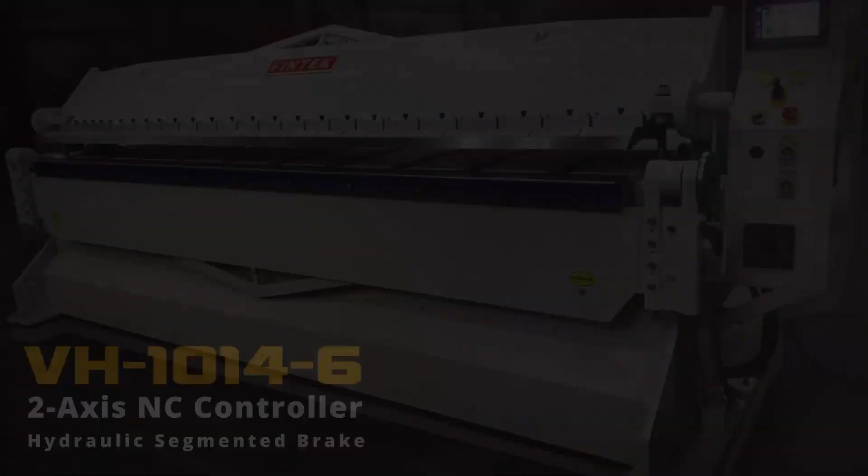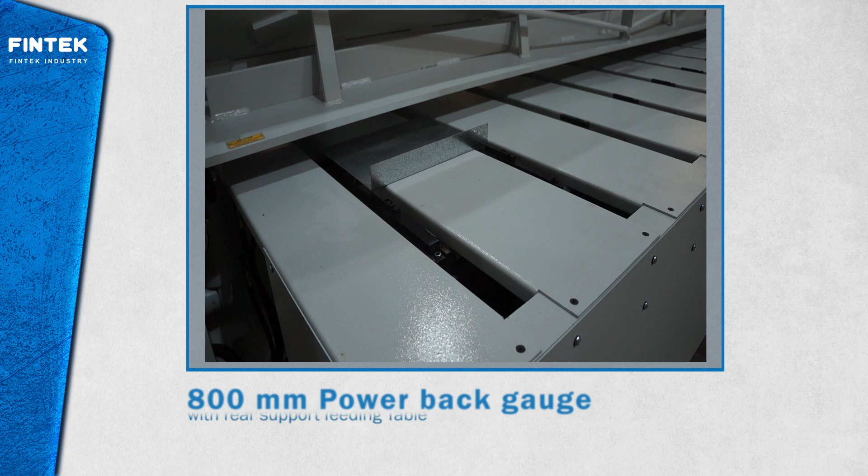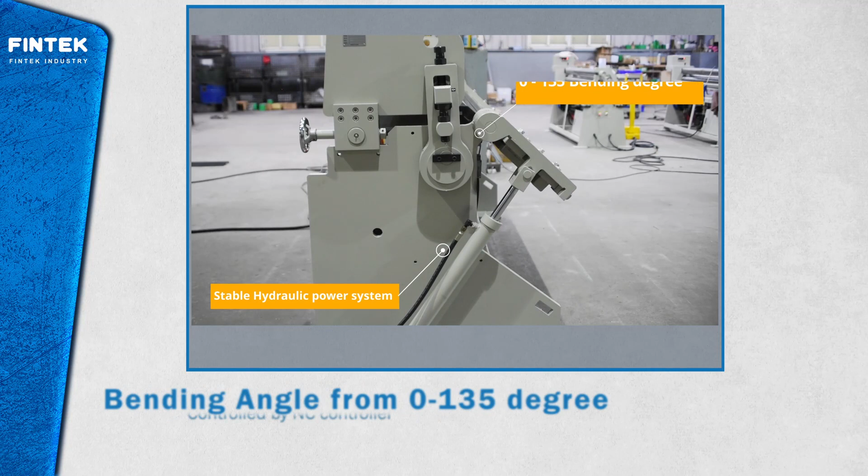The features of this model come with segmented finger blades for box bending, 800mm power back gauge, 2-axis NC controller with 7 inches touchscreen, upper beam adjustment for various thickness bending in perfect sharp angle, bending angle from 0 to 135 degree, and the function for 2-stage angle bar corresponds to multiple reverse bending.

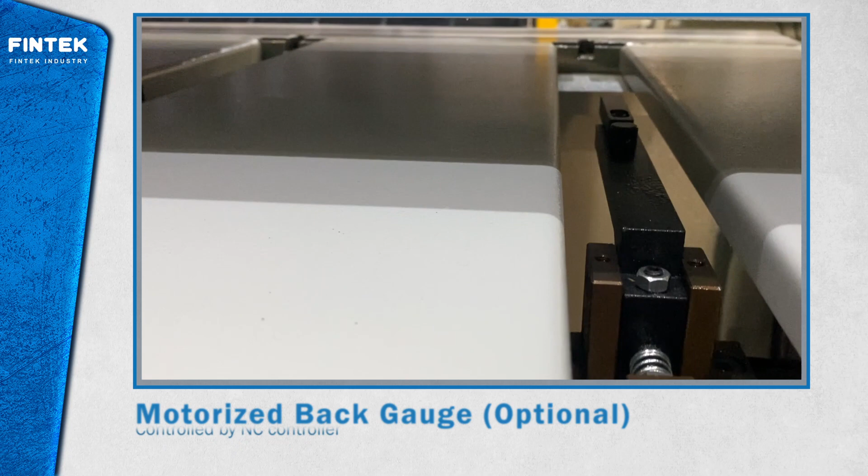This model is equipped with an optional accessory 800mm motorized back gauge with support table, and the controller has bend angle programming for accurate material positioning, angle bending, and fast movement to satisfy users' demands.

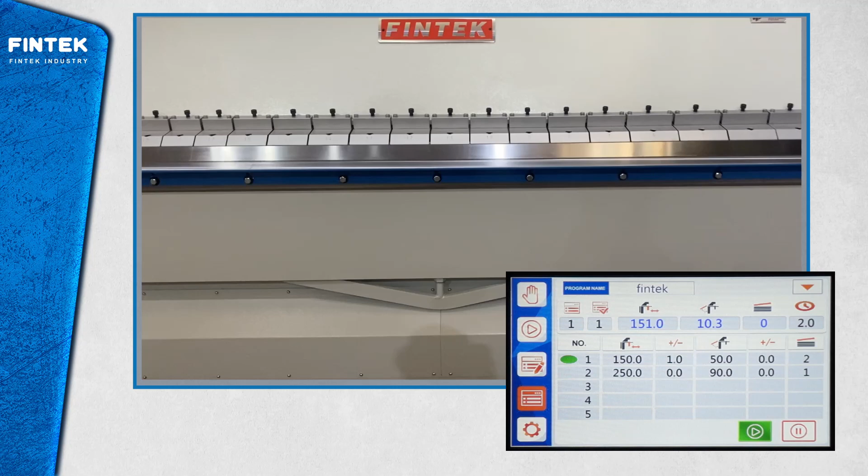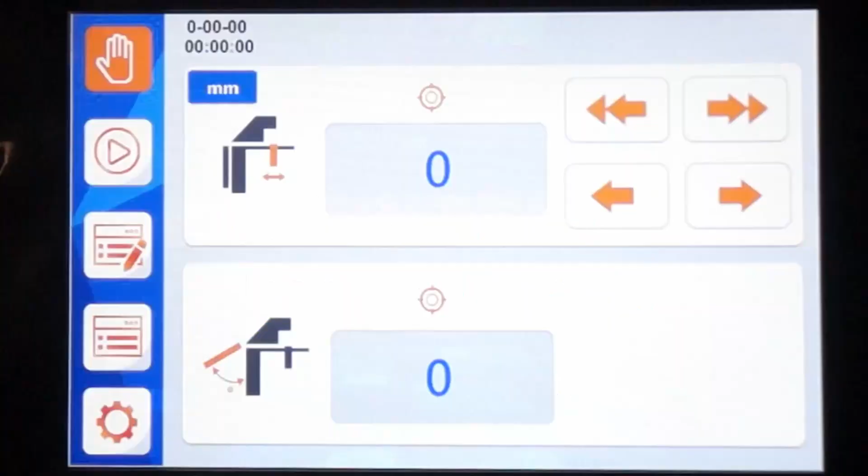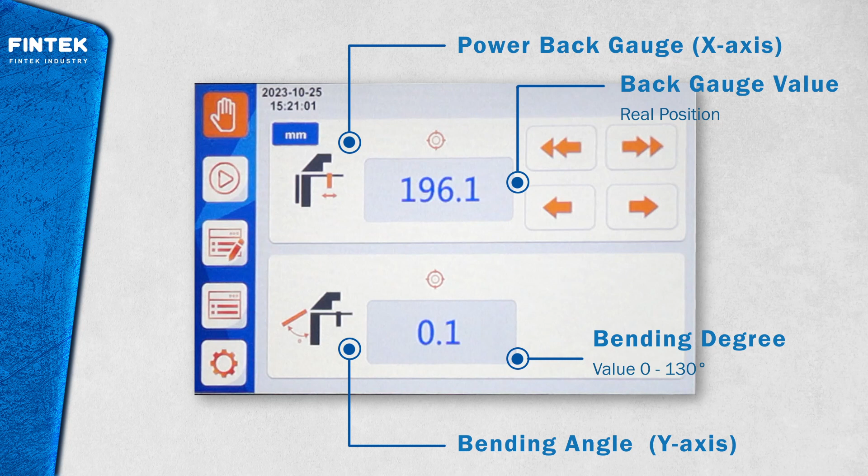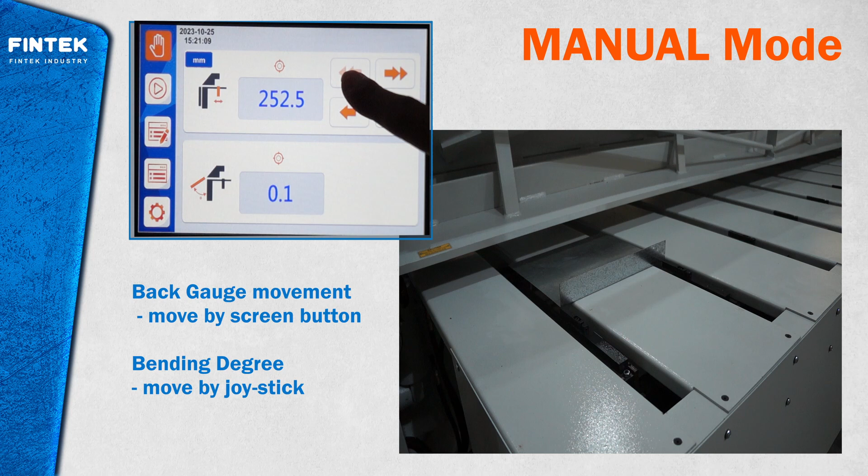The touchscreen is 7 inches in size, 2-axis NC for controlling the X-axis, which is the back gauge length, and Y-axis, which is the required angle. The controller has 3 main controlling modes: manual, automatic, and program. Manual mode allows users to manually control the back gauge length and bending angle by using touchscreen and joystick.

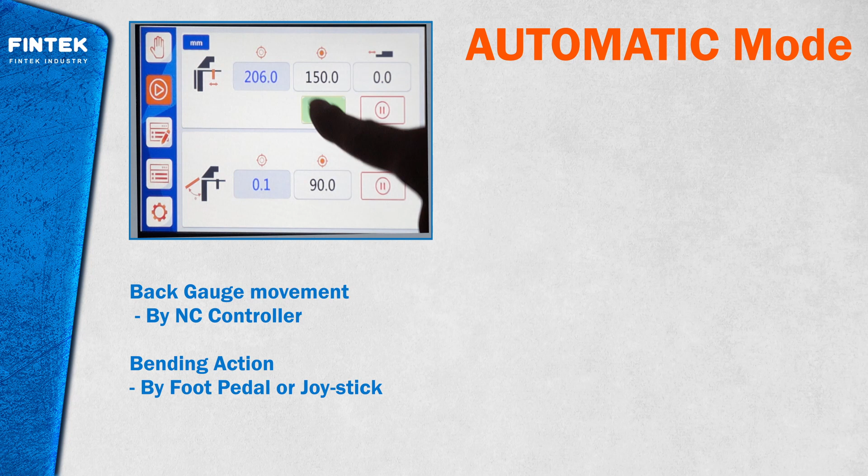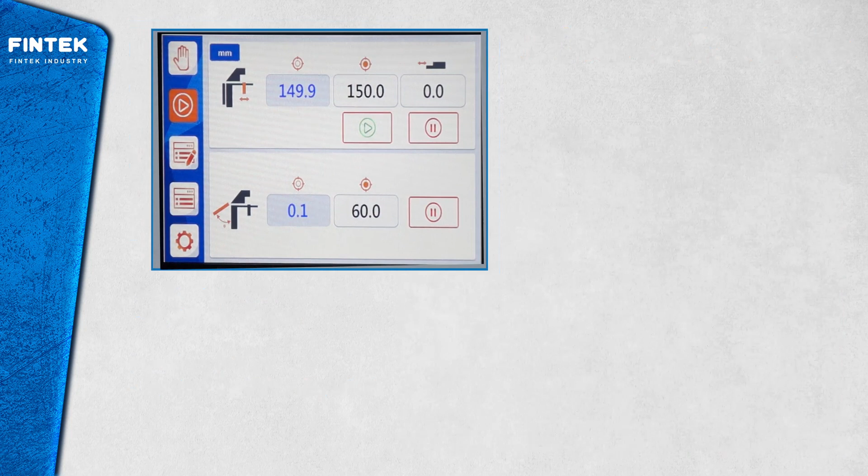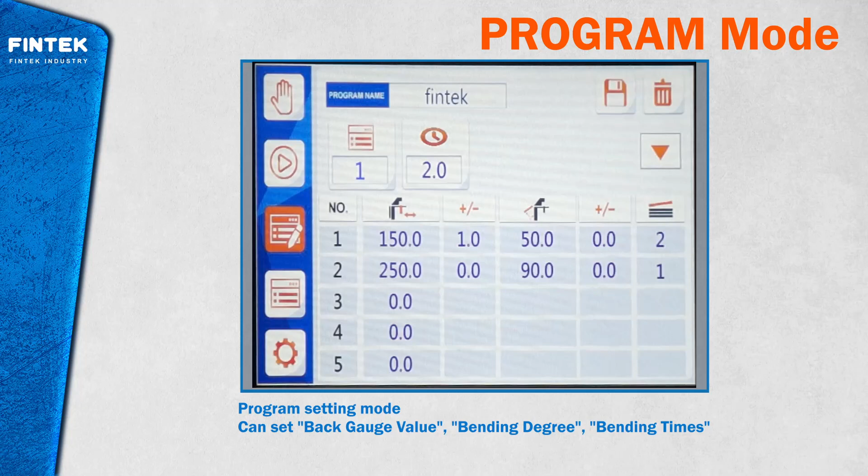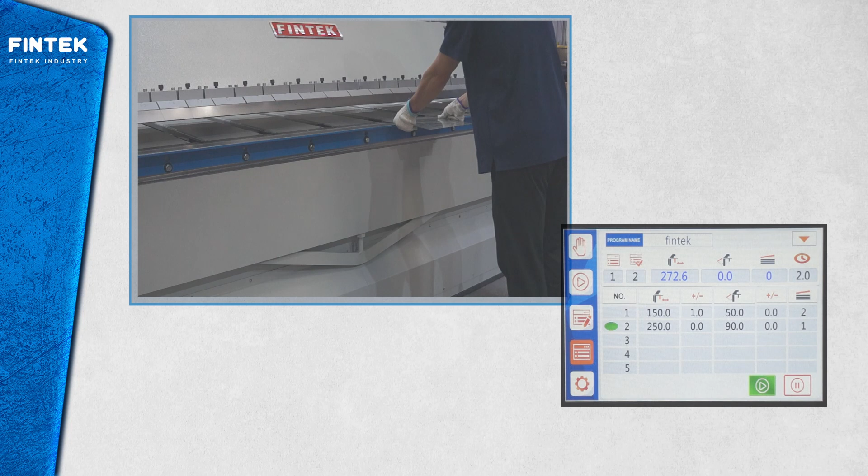Automatic mode allows users to enter desired numbers to back gauge and angle for the exact position. Program allows users to use program feature to set program for various shape operation. You can store up to 50 programs, and each program can store 45 steps in total. This comprehensive NC system will provide users with stable, easy operation, precise result, and time-saving efficiency.

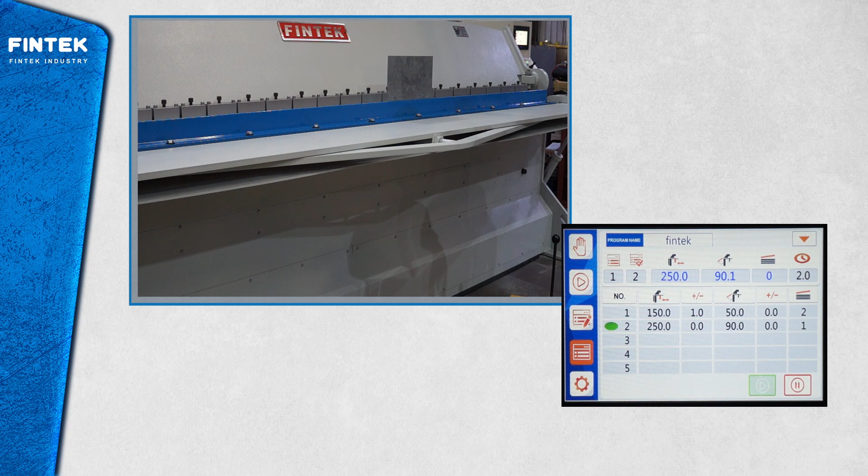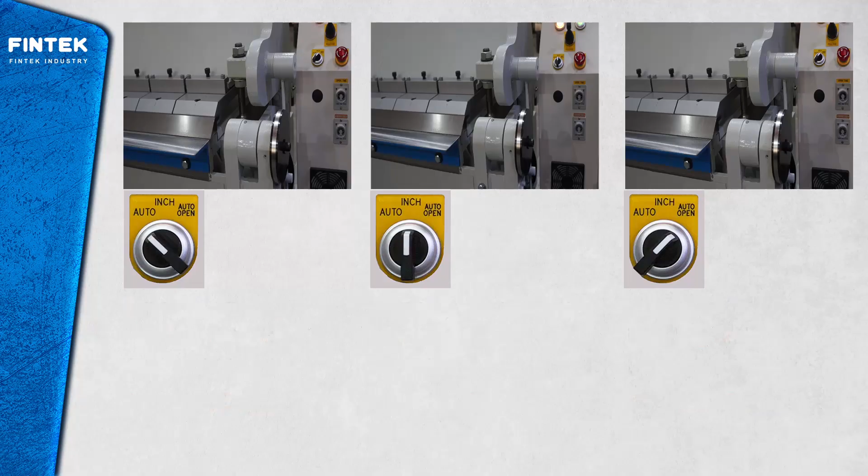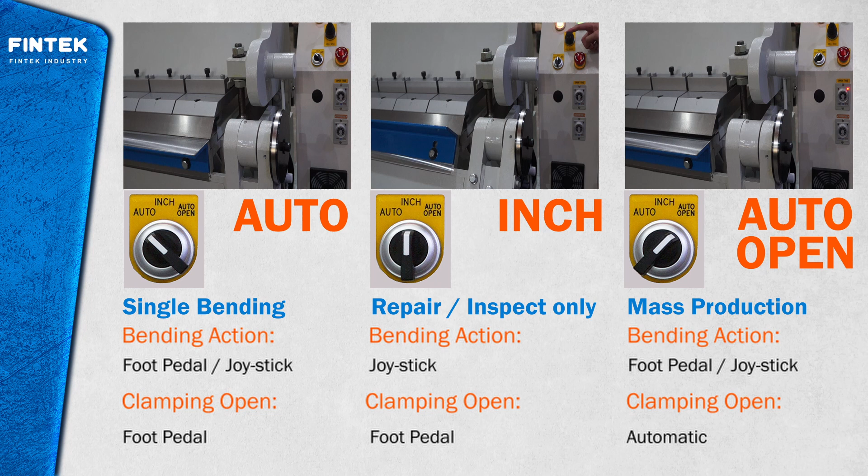Three bending modes are available: auto mode, auto open mode, and inch mode for bend inspection and maintenance purposes. Auto mode allows you to complete a single bend motion. Auto open mode allows you to run a complete bending cycle. It automatically opens the top beam after complete bending. It is mainly used for production.

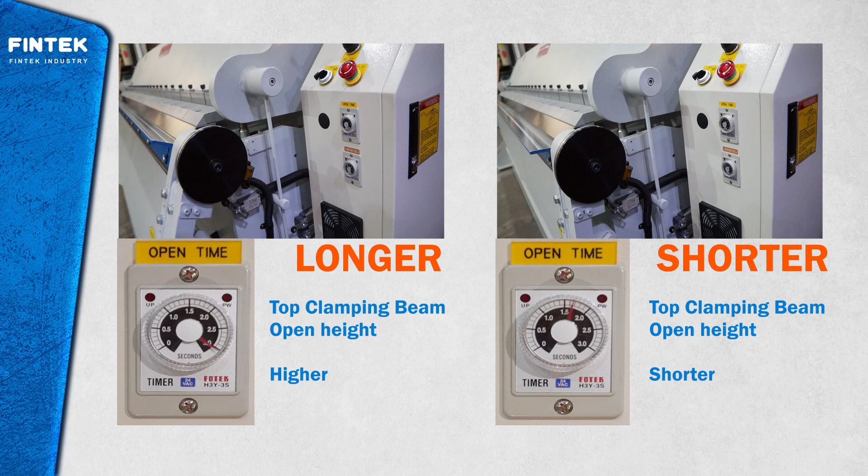There are 2 auxiliary devices for bend buffer timer and upper beam open timer. Open timer controls the upper beam's open height. The shorter the timer, the shorter the upper beam open height is. Bend buffer timer slows down the bending leaf's initial speed for small angle. Adjust it in accordance to your required angle.

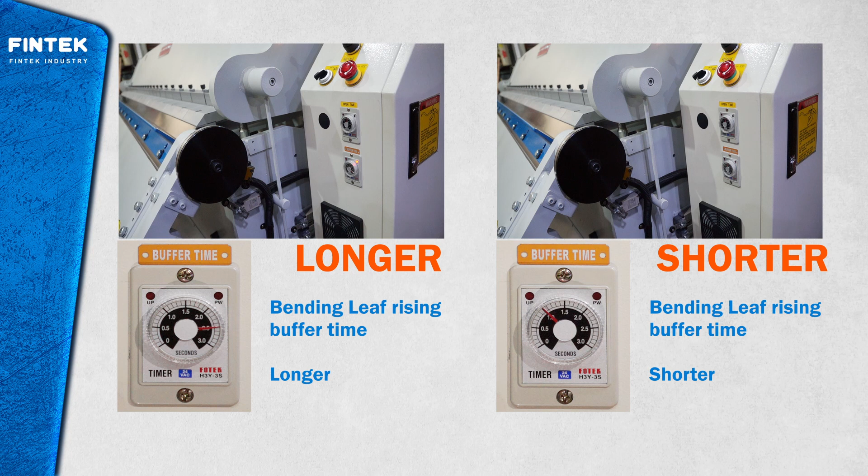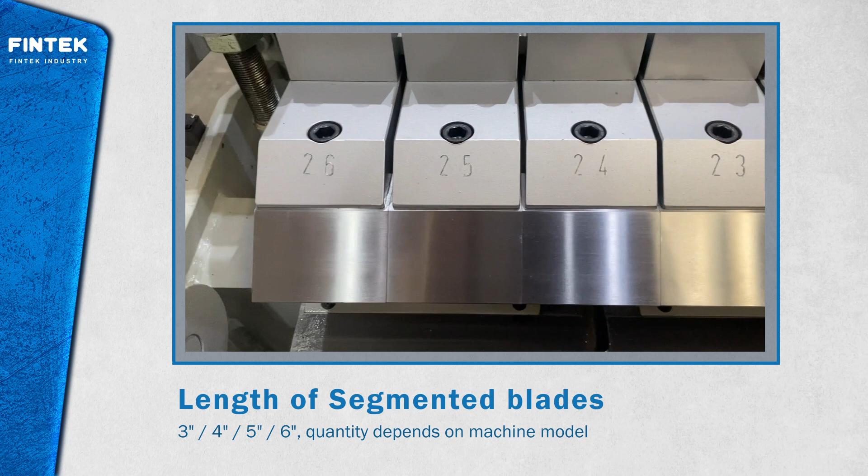The segmented blade can be taken off, depending on your workpiece. Its purpose is to do box and pan bending. You are able to move around each segment freely. Each segment is quite heavy, so please make sure to be careful of the weight. The lengths of these segments are 3 inches, 4 inches, 5 inches, and 6 inches. You are able to mix these segments with different lengths for various bending combinations.